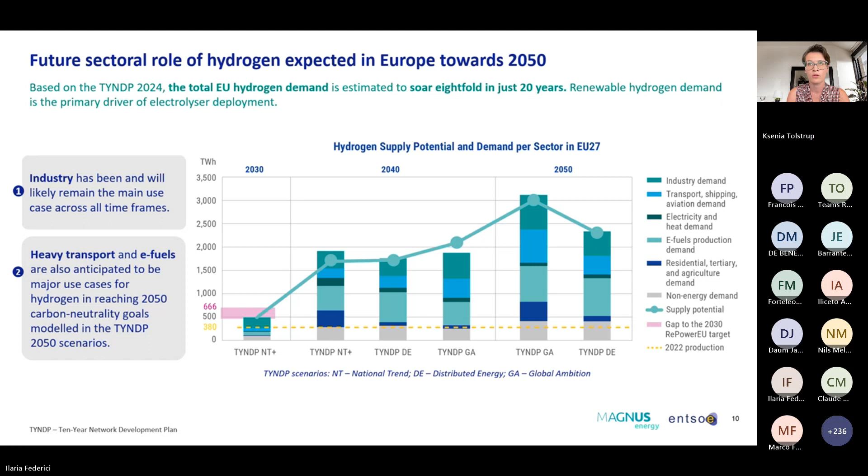And that is quite a significant number. And we also try to look at a little bit the drivers behind that and what can actually enable available production. And that brings me exactly to the next point about available production.

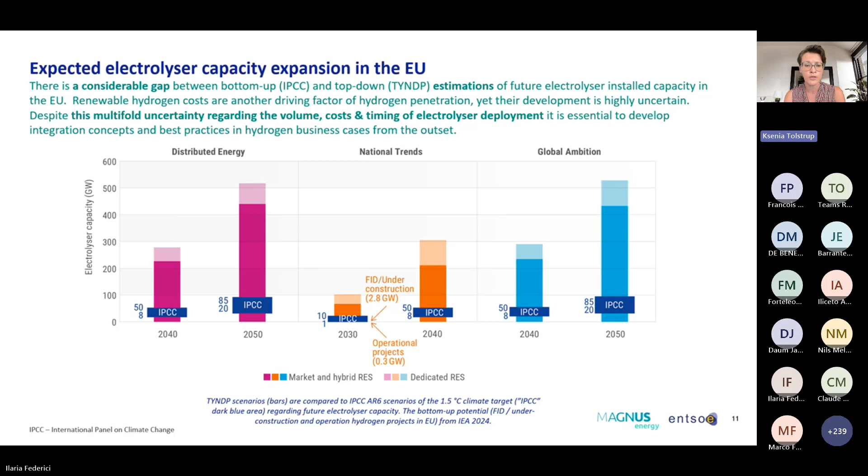And that brings me to the second part of this presentation. If we could go to the next slide. So we're looking at the main constrained capabilities of electrolyzers and their associated effects, the degree of electrolyzer capacity expansion that we expect in 2 different phases, and their associated flexibility potential. So if we go to the next slide.

So the most, let's say, flexible operation. And finally, market price-driven operation, where an electrolyzer operator intends to minimize their OPEX cost component, and in this way, trying to produce hydrogen in those hours where electricity is the cheapest or even negative prices, for example, are available.

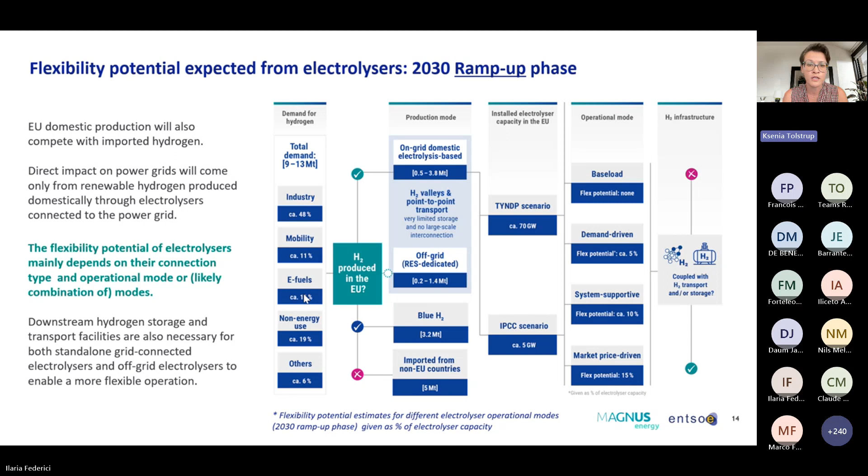Now, if we compare this picture with the 2050 mature phase, we will see that for baseload, flexibility potential remains 0, whereas the flexibility potential for the other operational modes has increased, so between 12 and 44%. Again, supported by this time available infrastructure, thanks to the European hydrogen backbone and the availability of storage potential, both short-term and long-term. We also see that the expectations for installed capacity are again quite wide-ranging, and this is why it is really important to keep in mind this degree of uncertainty.

However, we can only extract this flexibility potential from the electrolyzers, regardless of the volume, only if we look at that from that holistic perspective, where regulation and market design both incentivize the operational modes and configurations that are most beneficial for both electricity and hydrogen systems.

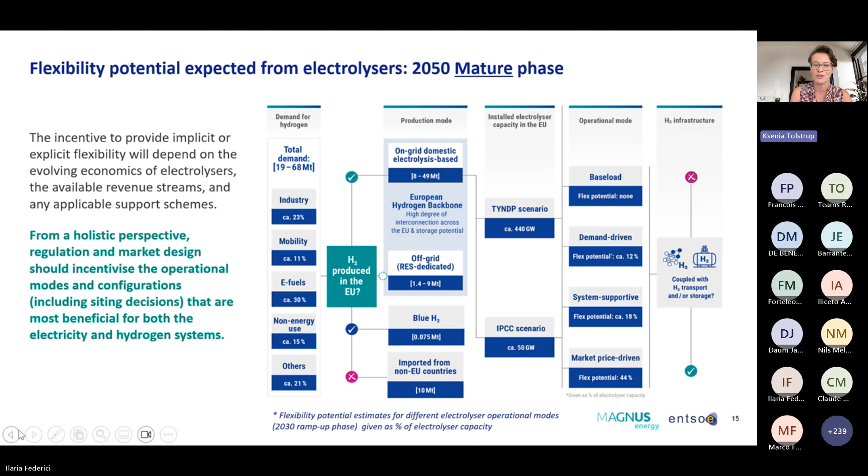In the last part, we take a look at the main cost and revenue drivers of electrolyzers, potential support schemes and market arrangements, and measures that can ultimately be taken in order to enable cost-efficient and flexible hydrogen production. So if we go to the next slide, you will see that in the end hydrogen costs are dependent to a large extent on demand for hydrogen. We already addressed that. On regulatory requirements, which includes not just EU regulatory framework, but of course also the national transposition of those requirements.

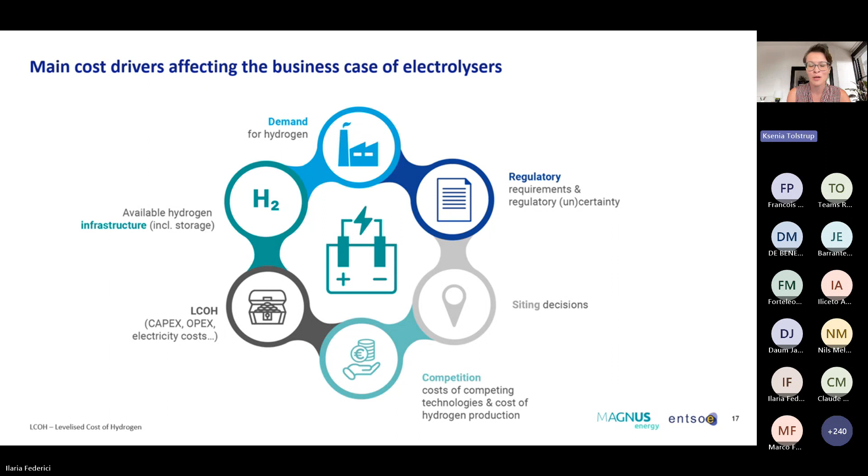Siting decisions: this is quite important to keep in mind, that depending on which country the electrolyzers are sited, the impact will be quite strong both on LCOH and on other components that are relevant for electrolyzers. On competition, it's important to consider not just competition among electrolyzers themselves, but also other competing technologies, for example, that are already providing system services. LCOH, that consists of CapEx, OpEx, electricity costs, and other components that we will see on the next slide. And last but not least, as I said multiple times, available hydrogen infrastructure. And so, as I promised, let's take a closer look at the LCOH situation.

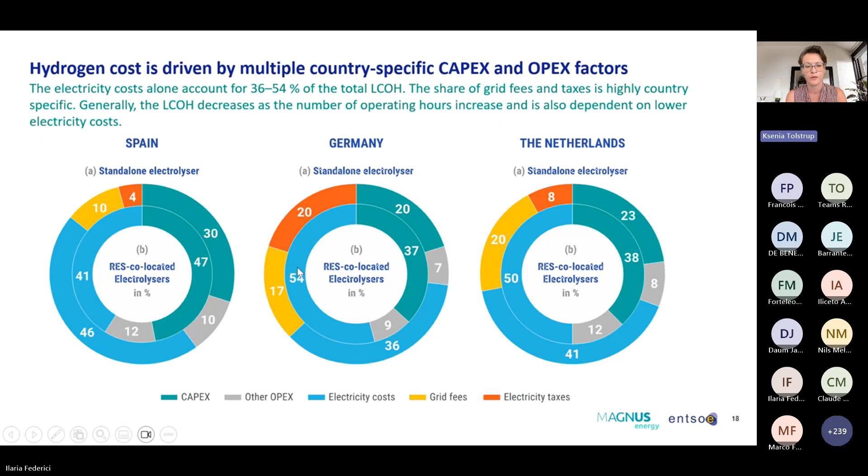However, if we're talking about standalone electrolyzers, then you have those 4 operational modes available that we discussed earlier, and their application will depend really on your main goal. And what is important here is that the main goal can also vary over time. So we also do not assume that a single electrolyzer always pursues a single operational mode. It can also vary over time.

But depending on the operational mode, it can either provide explicit demand response on top of hydrogen sales through explicit participation as a demand response asset from the power system perspective at different system service markets, or ensuring that they're price responsive, i.e. providing implicit demand response.

So here, what is also important to consider is that system services can offer quite an attractive revenue source for electrolyzers, but there are also a number of hurdles that are still present, because they're still up against competition from other technologies that are more established, and they still have to consider the sometimes rather complex pre-qualification processes.

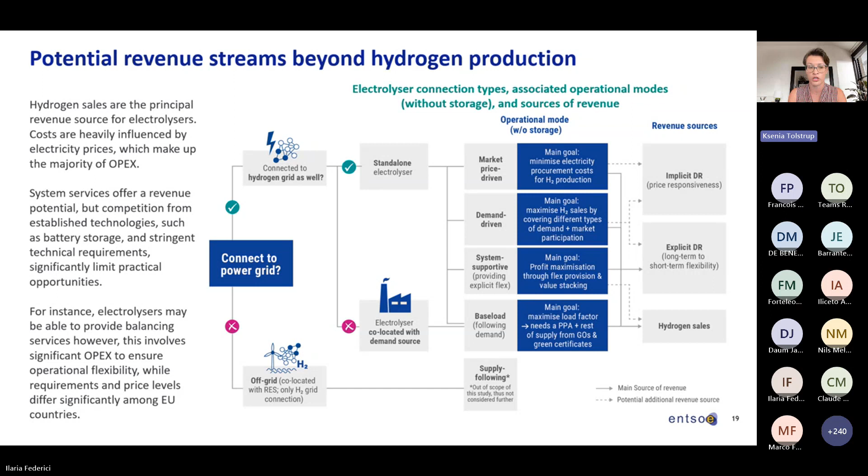Now, if we go to the next slide, you will see that there are additional revenue enablers that can be considered from this holistic perspective that can support the business case of electrolyzer operation that is also system friendly to a larger or a lesser degree. So these are renewable energy PPAs, hydrogen CFDs or offtake agreements to reduce exposure to hydrogen price and volume volatility,

removal of barriers to grid service provision, exemption from renewable levies for green hydrogen production, hydrogen guarantees of origin to justify a premium on green hydrogen, and finally, flexible connection agreements to incentivize grid-friendly siting decisions and avoidance of potential grid congestion.

If we look at the next slide, you will also see the outcome of our mapping of these different revenue streams. And I think, Ilaria, if you just can click through the 3 animations that I had. I would like to just focus on these 3, and you can look at the details in the report itself. Since an electrolyzer is really at the intersection of electricity and hydrogen markets, different levers are potentially available for them to maximize their business case.

On the electricity market side, a flexible operation can provide this additional attractive market-based revenue, whereas on the hydrogen market side, for example, guarantees of origin can play a critical role in certifying renewable hydrogen and providing proof of compliance with EU requirements, as well as a potential additional source of revenue.

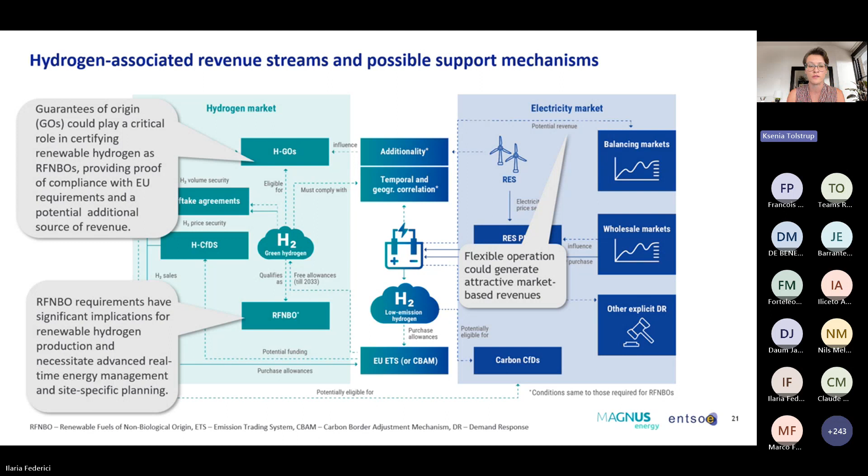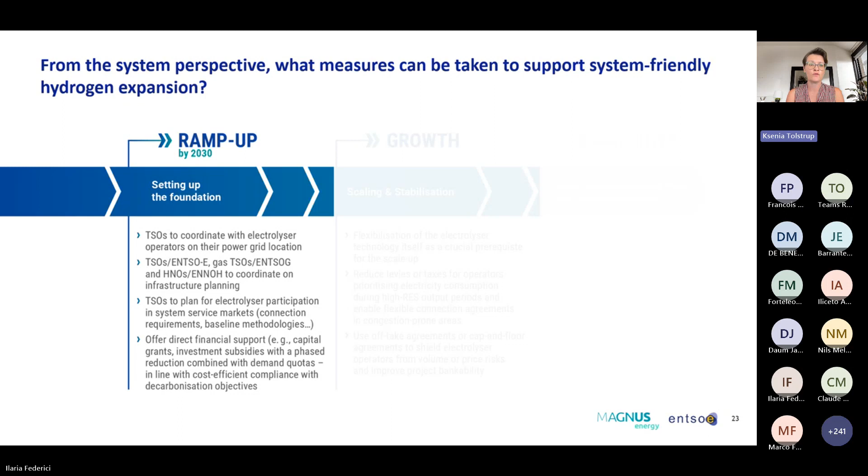And that brings me to the final slide of this presentation that shows you that different measures are ultimately needed in order to support system-friendly hydrogen expansion and prepare it for the final subsidy-free and flexible operation. We're of course aware that these things do not happen overnight, and this is why by 2030, it is important to set up the foundation for coordination among the different stakeholders, planning for electrolyzer participation in service markets, and offering direct financial support, such as, for example, investment subsidies.

For the growth phase, it is important to enable the scaling and stabilization of the hydrogen sector by enabling flexibilization of electrolyzer technology, reducing levies and taxes for renewable hydrogen production when high renewable output is available, and considering the use of, for example, offtake agreements and cap and floor agreements to shield electrolyzers from excessive risk.

Finally, it is in the maturity phase that we expect the phase out of direct subsidies, the use of competitive PPAs, providing explicit demand response by electrolyzer operators, and making full use of advanced hydrogen storage and infrastructure capabilities. So this would be the end of my presentation.

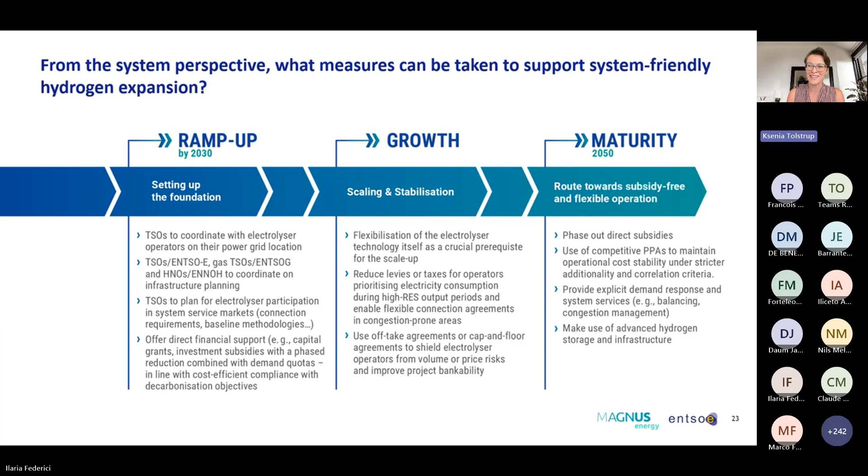Thank you, Ksenia. I'm Antonio Iliceto, working for the Italian TSO, and I'm co-convener in ENTSO-E of the Working Group of Future Energy System. There is much more than we have shown in the reports for who is interested, but let's focus now on key messages to feed the debate and inspire the questions on Slido. First, key messages are about grid planning and more general investment infrastructure.

So first point is that we acknowledge that electrolyzers, large ones and many scattered over all Europe, will become not only a new load requesting connection, but a new component of an energy system which is going to be more and more integrated. And also, although in a lesser quantity, generation which will be fueled by hydrogen. So we will have power to gas and gas to power.

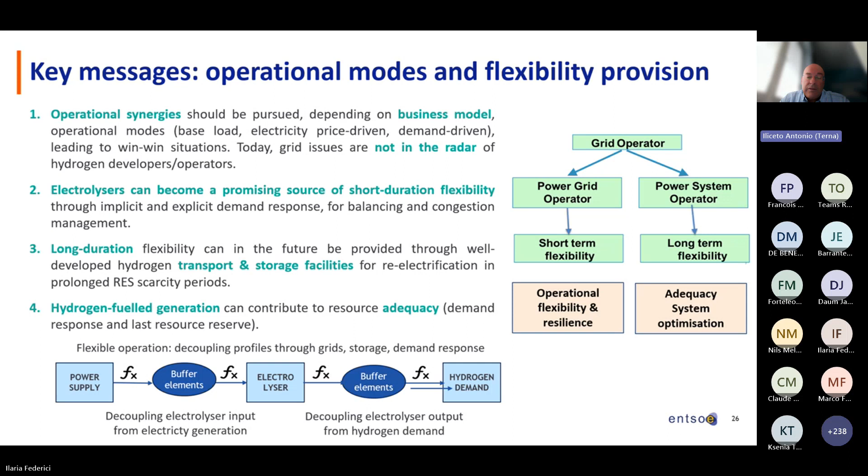On the demand side, well, this is the typical chicken and egg problem. The demand is waiting for supply. The supply is waiting for off-take contracts. So this could be a good way to start and solve with a public intervention the chicken and egg problem. Also, de-risking and facilitating the purchase contracts of electricity.

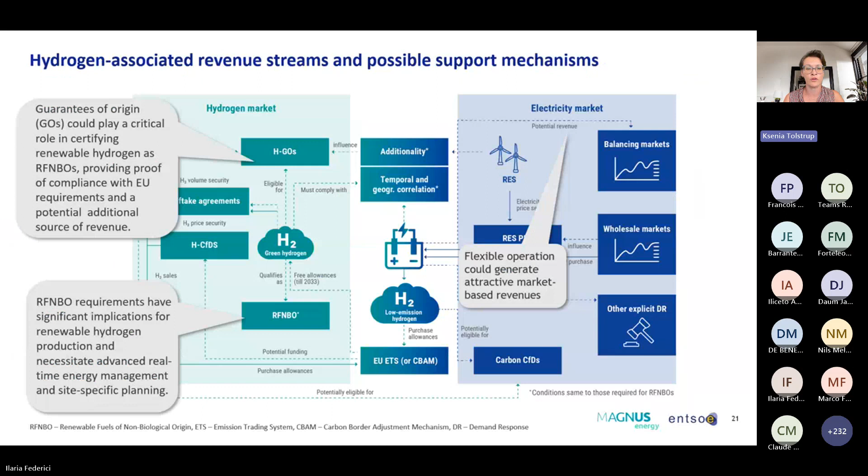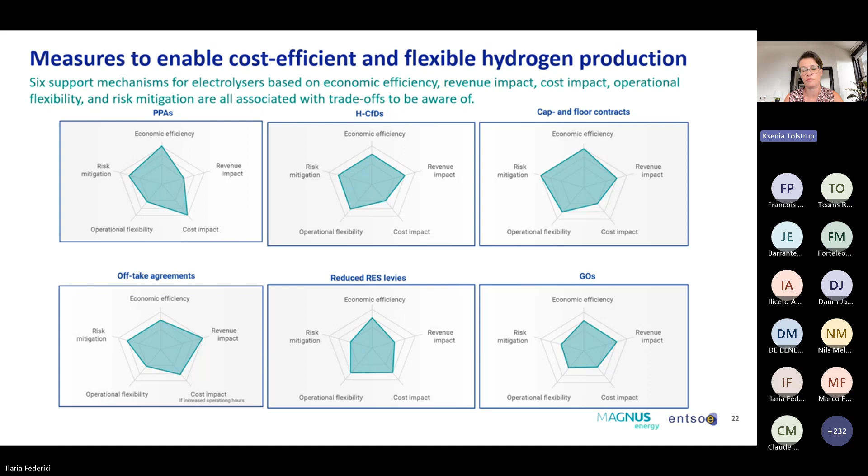So market efficiency, or economic efficiency, i.e., also whether this type of measure has a distortive market impact or not. We looked at whether this measure works towards, let's say, shielding the revenue or the cost part of electrolyzer operation, whether it can provide or incentivize operational flexibility, and finally, whether it helps to mitigate the risks for the electrolyzer business case. I hope that answers the question.